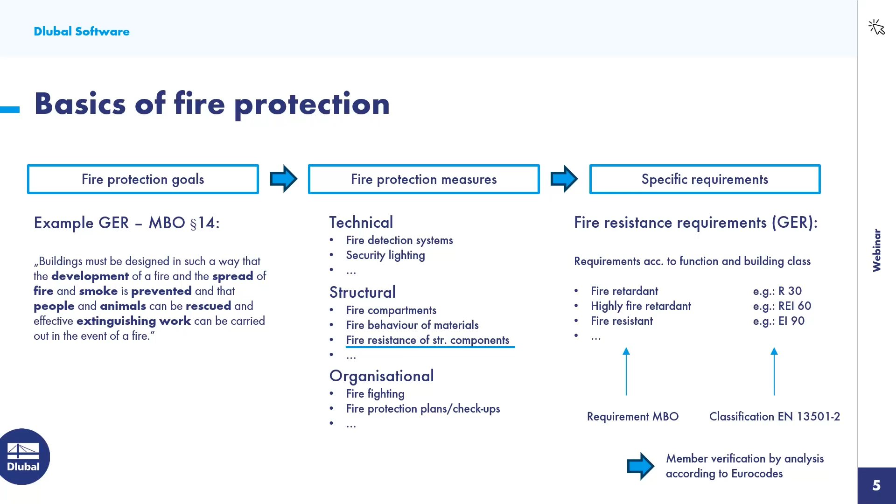So let's take a look at how fire design is regulated in the Eurocodes. I would like to start with the combinatorics.

According to Eurocode 0 or EN 1990, the case of fire is to be regarded as an exceptional design situation. Accordingly, the mechanical actions are combined without partial safety factor. The use of psi 2.1 is recommended in the main document for the leading variable action, but there are many deviations in national annexes. In Germany, for example, psi 1.1 is prescribed for leading wind actions.

It is obvious that the combination rule results in significantly lower actions when compared with the permanent and transient design situation that we commonly use for design under normal temperature. As a safe side assumption, the loads from the cold design multiplied by a reduction coefficient can also be used. However, this is generally uneconomical and therefore not recommended, especially when we use a design software that can do the correct combinations anyway, like RFEM.

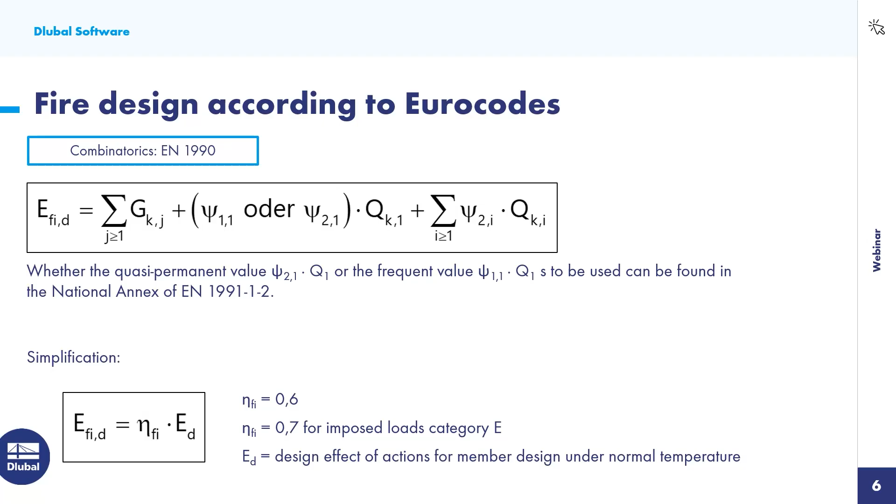In addition to the mechanical actions, the thermal action in accordance with EN 1991 Part 1.2 must also be taken into account. In the event of a fire, there's a considerable increase in the ambient temperature, and sooner or later, the structural elements exposed to the fire will heat up as well. This has a dramatic effect on the material properties of steel components on one hand. On the other hand, the temperature increase can lead to indirect stresses in case thermal expansion is restrained.

Real fire scenarios develop in 4 stages. We have the incipient stage, the growth stage, the fully developed fire phase, and the decay phase. The transition to the full fire phase is called flashover and is associated with a rapid rise in temperature.

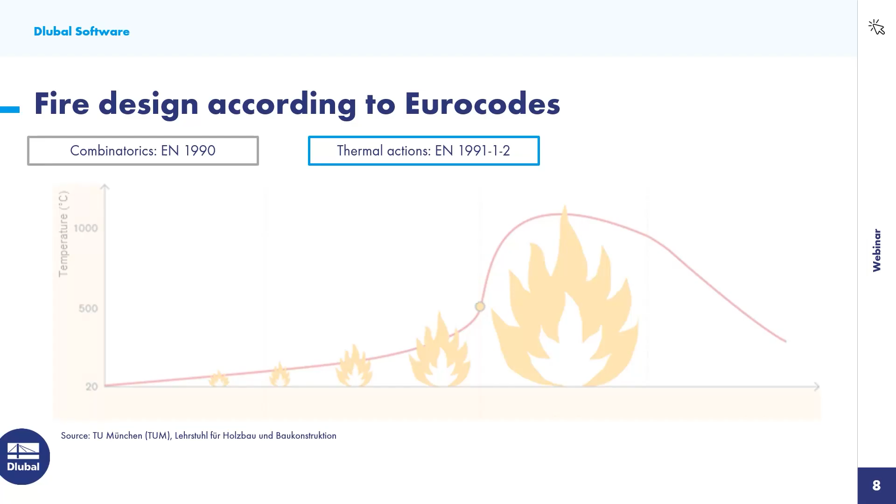For engineers, it is very challenging to accurately predict the development of a natural fire scenario. Instead of trying, so-called nominal fire curves have been established almost 100 years ago to describe the temperature developed in a compartment over the duration of the fire in a simplified manner.

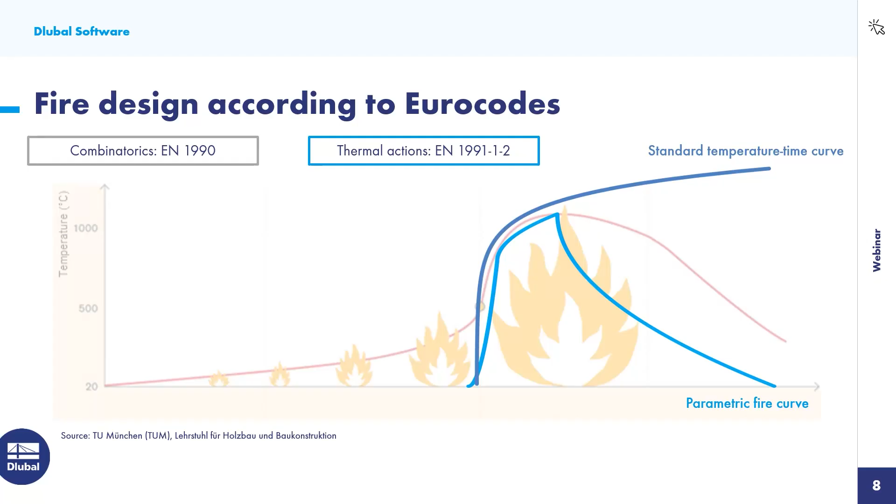The standard temperature curve is used for fires inside buildings. This temperature curve is also used for standardized fire tests on structural elements, which means that the behavior of typical elements under this nominal fire exposure is quite well documented and verified. Alternatively, the Eurocode also allows the use of more sophisticated approaches to predict the temperature development, such as parametric fire curves, zone models, or results from CFD analysis.

The actual design of structural elements is regulated in the respective material-specific Eurocode, such as the Eurocode 3 Part 1.2 for steel construction. In principle, all ECs or Eurocodes distinguish between 3 alternative methods with increasing complexity and accuracy.

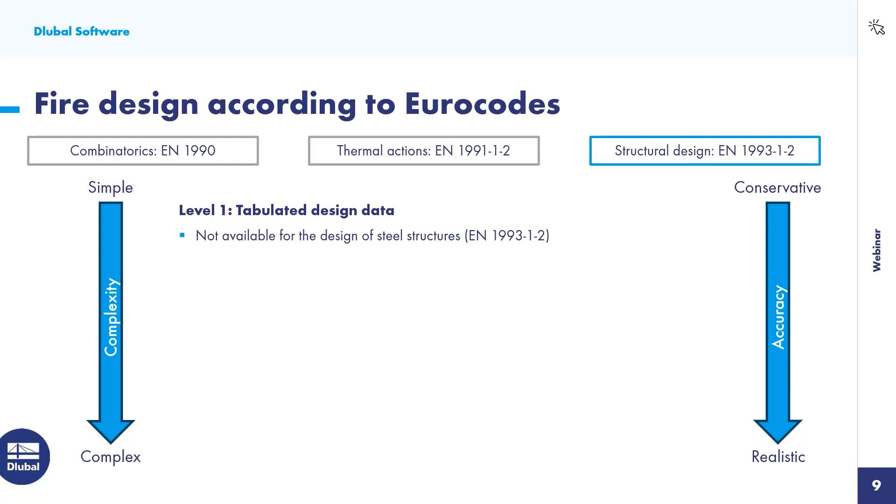The simplest design approach is design by tabulated data. This is oftentimes used for fire design of concrete elements, where it is sufficient to choose the suitable dimensions, for example, wall thickness, for a specific fire class. This approach is unfortunately not available for steel structures.

In the second level, we find the so-called simplified design methods. Here, the thermal actions are prescribed by nominal fire conditions, such as the standard temperature curve for fires inside of buildings. For such conditions, Eurocode 3 Part 1.2 gives clear rules for the design of steel members. This verification can either be done based on the resistance or based on the critical temperature.

The most accurate but also complex analyses are possible under the advanced design methods. The thermal actions are usually derived by more sophisticated methods here, such as parametric fire curves, zone models, or CFD. This enables a more economic design most of the times.

The design rules are very openly formulated. Any suitable thermal and mechanical analysis model can be employed. However, the validity of the chosen approach must be proven on a case-specific basis and requires a high level of expertise. In RFEM 6 and also RStab 9, the resistance-based simplified design method is implemented.

A system calculation under elevated temperatures is not required in this case. The design concept is very similar to the design under normal temperatures, but under reduced load as we combine actions in the exceptional design situation. The thermal action is only taken into account on the resistance side and induces a reduction of design-relevant material properties. I would like to explain this point more detailed in the next slides.

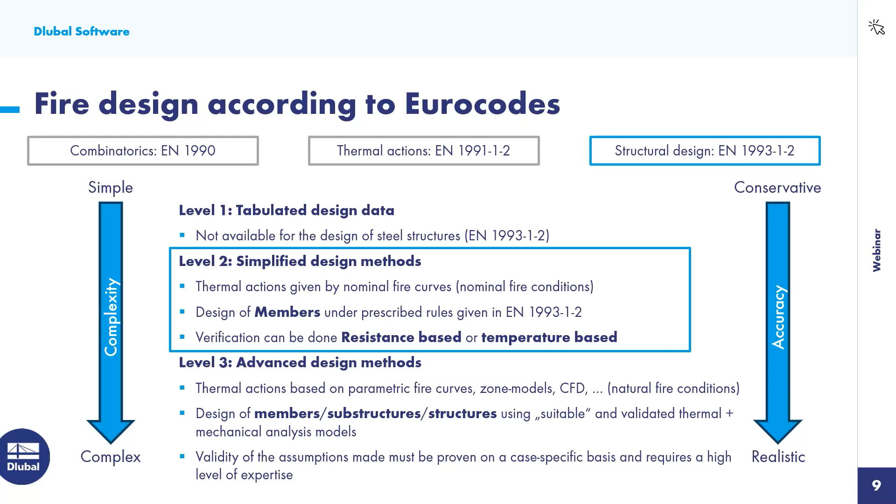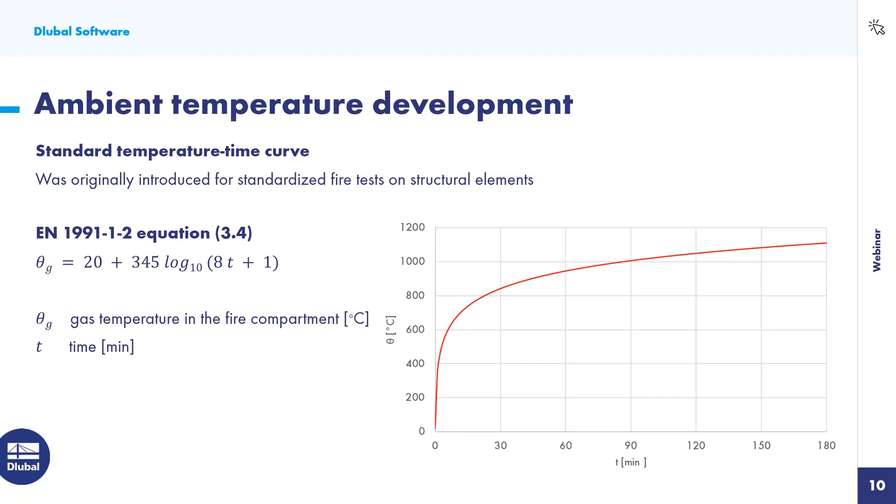As explained on the previous slide, the simplified design method is linked to the application of the standard temperature curve. This means the development of the ambient temperature during a fire is approximated in a simplified manner according to the logarithmic function shown here. The standard temperature curve idealizes the full fire phase and neglects the growth and decay phase of the fire.

So the development of the ambient temperature is specified by the standard temperature curve. However, for design purposes, we are interested in the actual temperature of the structural member. According to EN1 or Eurocode 1, Part 1.2, two different components must be taken into account when analyzing the transport of heat from the surrounding hot air into the heated component.

The heat flux from convection, so the exchange of heat from the hot ambient air and the cold component surface in the boundary layer, and the heat flux from radiation or thermal radiation.

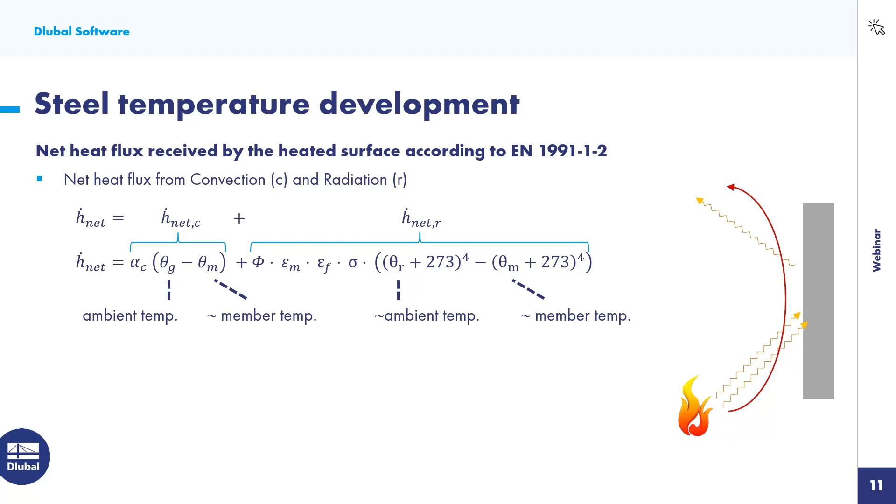We will come back to the various parameters in detail later, as they are important influencing variables for fire design and any fire protection measures. For now, we take note that we can describe the relationship between ambient temperature and component temperature in the event of a fire. But how does the member temperature actually affect the design?

According to Eurocode 3 Part 1.2, design-relevant material parameters such as the yield strength and stiffness must be reduced depending on the material temperature. The yield stress only has to be reduced at temperatures above 400 degrees Celsius, but then quite rapidly, as you can see here. The stiffness already decreases at significantly lower component temperatures.

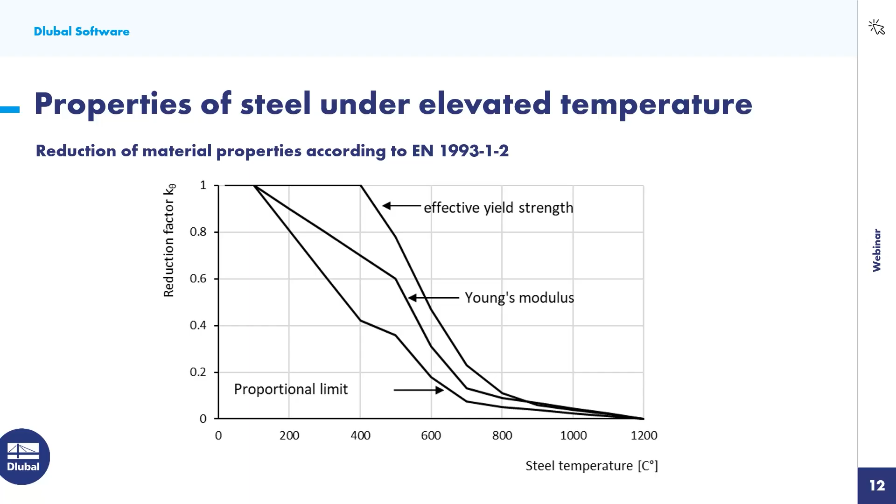Okay, so I have already prepared this simple model beforehand. It's just a simple beam with an intermediate support in lateral direction in the middle. It's an HEA 300 section and 10 meters long. I think the steel is S235. This member is already loaded by 3 load cases: self weight of the beam itself, then an additional dead load of 5 kilonewton per meter, and load case 3 is imposed load category B with 7.5 kilonewton per meter.

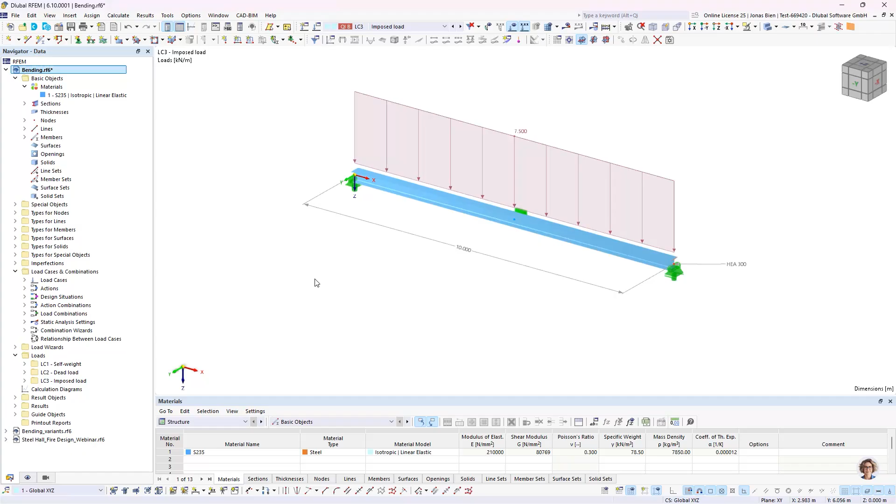I've also defined one design situation for the code design of this member, so the usual combination permanent and transient, as you can see here, and this results in automatically generated load combinations.

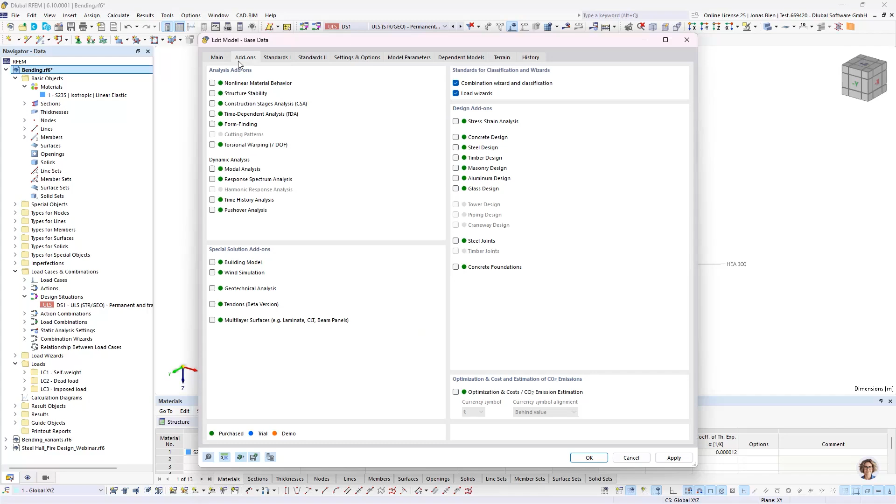I want to start with the code design. So I switch on the steel design add-on, go to standards, and for now I will just use the main documents of the Eurocodes and use the common rules.

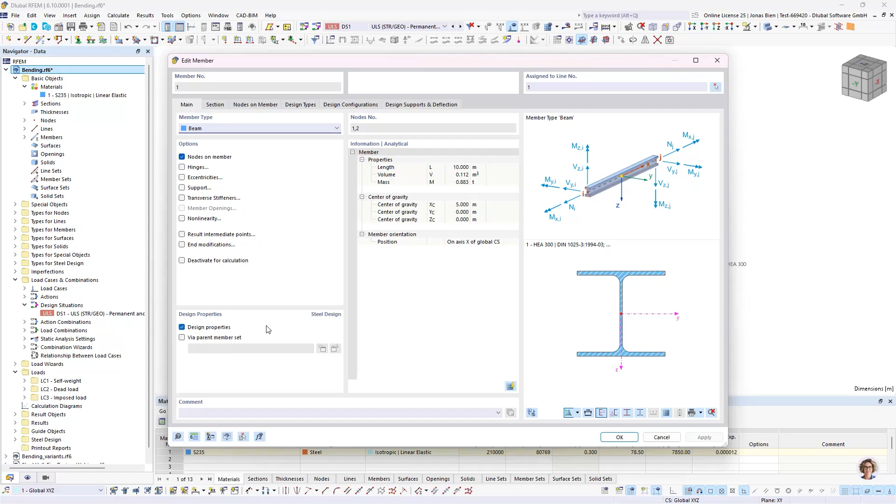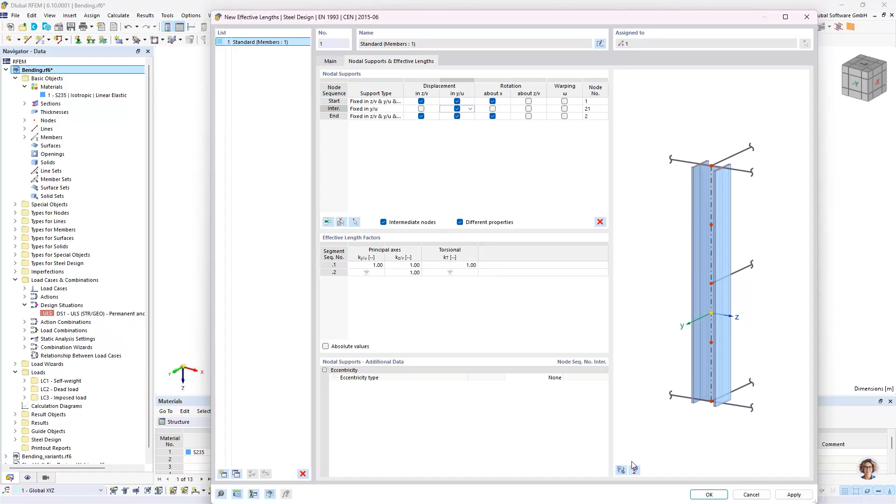As we are used to, the design add-on has already recognized that we have this member that can be designed with our steel design add-on. Besides the section checks, I also want to do the check for lateral torsional buckling according to the equivalent member method, so I will define an effective length. I want to leverage the intermediate node, so I will assign a lateral support here at the middle, as we have modeled it in the global model as well.

Okay, so let's do this. By the way, this assignment of the buckling length is valid for the code design and also for the later fire design that we are doing.

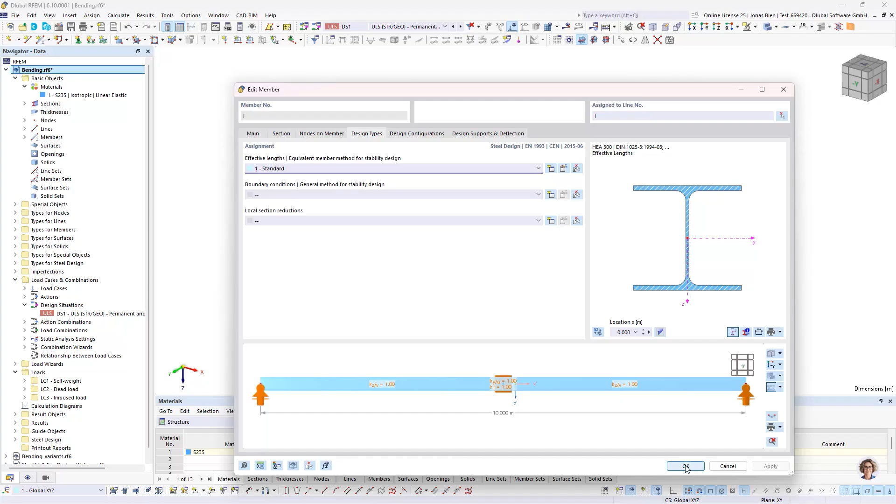But for now, let's start with the code design, the usual thing that we know. I will just run the simulation now, this very simple case, and we will check the utilizations that we get under normal temperature. As we are used to, we get section checks for shear and bending, also shear buckling. Since we activated the buckling length, we also get the stability check for lateral torsional buckling. We can see that the maximum utilization is around 83%.

So this is completely fine, everything's good so far. Now let's see how this changes when we investigate the fire scenario. Let us do all the adjustments that we need in order to activate this. First of all, we need a design situation that is appropriate for our fire case.

So I will add a second design situation for the accidental load case using psi 2,1 as it is prescribed in the main documents of the Eurocode. We can again check the combination rule, and this is totally fine for us and looks like the rule that I showed you before in the slides. Okay, so I get two additional load combinations now for the fire situation.

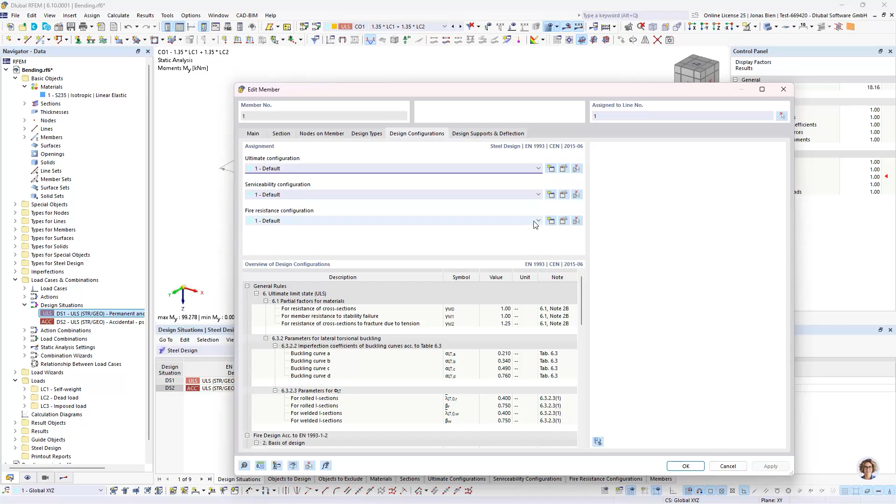In here, we first have to define what the resistance class of my member is going to be, so at what time I want to perform my fire design checks. In this case, I assume my member needs to survive for 30 minutes, so it has an R30 requirement. I will set 30 minutes as the required time for fire resistance.

We can also see under the temperature curve for determination that we have, by default, the standard temperature time curve set, and this is the one we want to use for internal fires and the member design method here. We could also give a manual material for the program to use in the fire design checks, but we want the temperature of the steel defined by the standard temperature time curve.

And we want to do the check after 30 minutes. The remaining parameters I will not touch yet - we will come back to this later. So I will just assign this by clicking OK, and then I will run the steel design again.

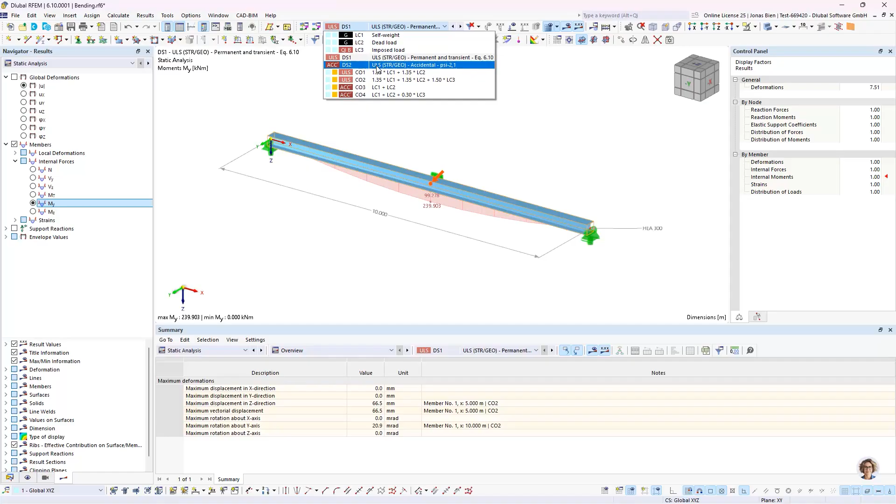We have to solve now the two additional load combinations, and then the steel design runs again. First, I want to compare the forces that we now have to take for the design. If we check the maximum bending moments for design situation 1, the cold design case, we have a maximum bending moment of almost 240 kilonewton meters, while in the second design situation under accidental combination we get more or less 100 kilonewton meters. So the load we need to consider in the hot design is much smaller than in the cold design.

However, as we could already see, we now have a big problem with our design verification checks. The maximum utilization is over 300%, so that's not good at all. Let's check why that is, and how the utilization is so much higher than in the cold design stage. Let's compare some design checks.

We could start with the bending check about the strong axis, starting with the cold design, which we are very used to. We have the 240 kilonewton meter design bending moment. We do the section classification and see we have a class 1 section, meaning we can use the plastic design resistance to calculate our utilization. In this case, we have a utilization under 80%.

But how does this change in the fire design situation? Let's check the respective check under increased temperature. We see we have a smaller design bending moment as already shown before, and now we also have a different section class. That's interesting, and we can check what the reason for this is.

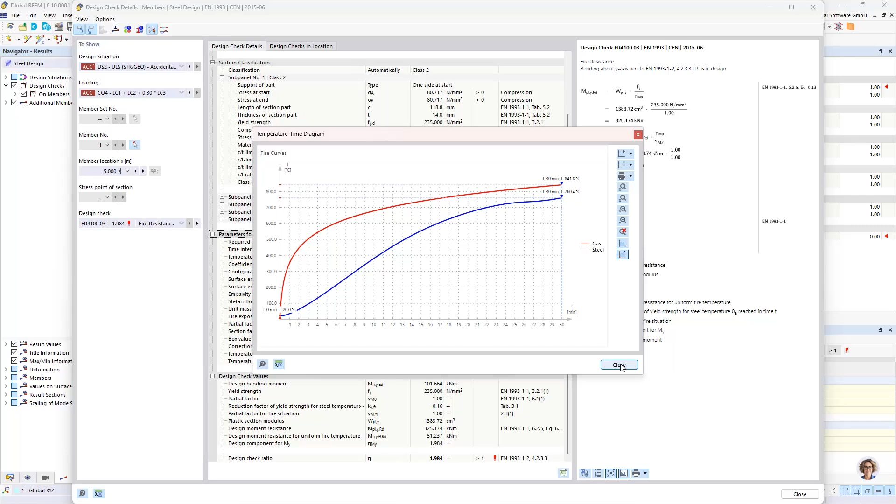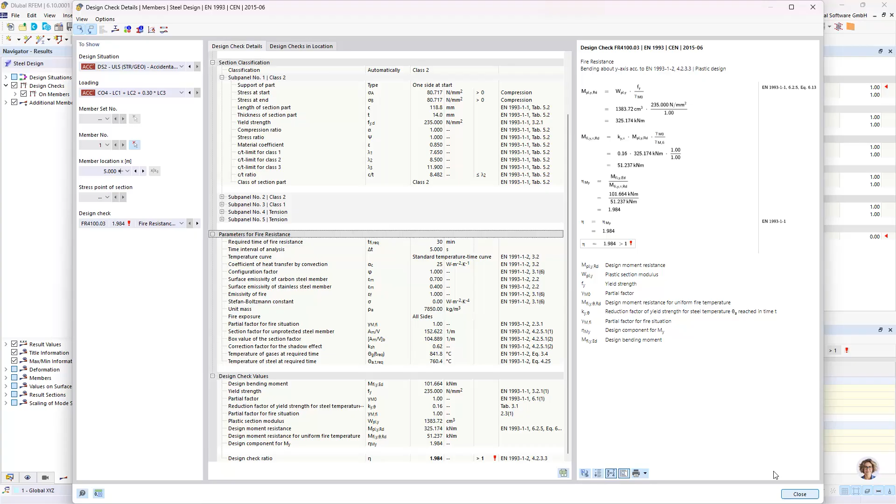There are also some other parameters here given for fire resistance. Up here we find all the settings assigned to this member by the fire design configuration, and then some additional parameters that I will focus on later. But for now, we can see that for the cross-section checks, we have a drastic reduction of the resistance due to the increased temperature, which is very high in this case. Maybe we can also check the stability design check, because that also reveals some details to us.

First of all, we calculate the critical bending moment the same way as we do it for the cold design. I think this 757 should be the same for the cold case as well. When we check the stability design check, yes, it is 1-to-1.

But then in the fire situation, we have to again reduce it by taking into account a modified dimensionless slenderness. In this case, this dimensionless slenderness is not only modified by the reduction factor for the yield stress, but also depends on the reduction factor of the stiffness, because stability design checks are also very much dependent on the stiffness of the system. So any degradation on that side will also alter our verification check for instability.

Another important point is the derivation of our imperfection factor. While in the cold case this is dependent on the cross-section buckling curve, here it is only dependent on the material of the section. So there are slight adjustments, but otherwise the schema for the verification checks is very similar to the cold design case.

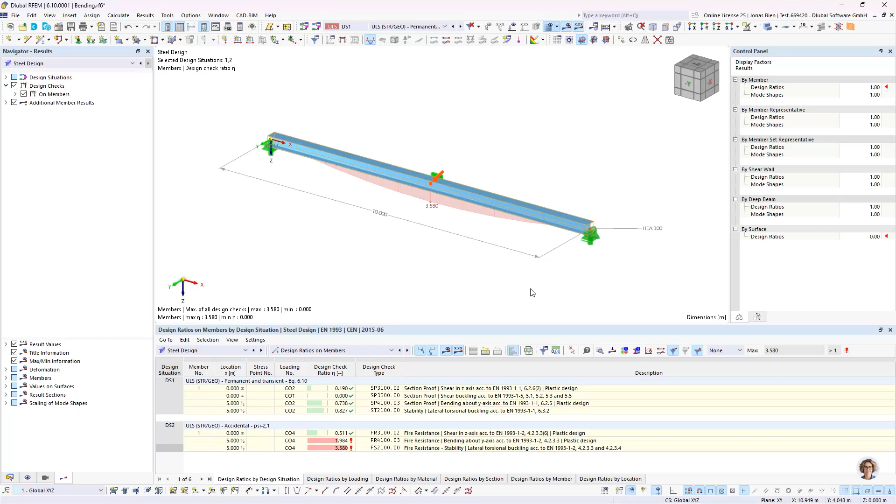I think we can agree that our first attempt to verify the fire resistance of this beam was not very successful. So what can we do to increase the fire resistance of our beam? Of course, we could lower the loads or increase the section size, but we have seen that the member heats up very quickly and we have only minimal strength and stiffness after 30 minutes.

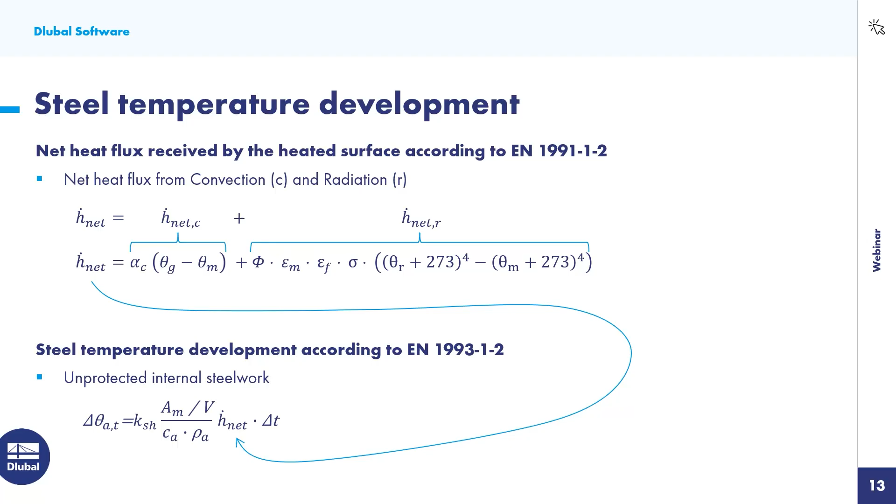To discuss possible measures we can take to delay the heating process, I would like to come back to our formulas that describe the heat transfer from the ambient temperature into the structural element. We've seen these before, and if we combine the two formulas, we get this quite long expression. Most of the parameters represent physical constants that we as structural engineers cannot influence as much as we'd like to: the specific heat of steel, the density of steel, the coefficient of heat transfer, the configuration factor, the emissivity of fire, and the Stefan-Boltzmann constant. Those we shouldn't touch at all.

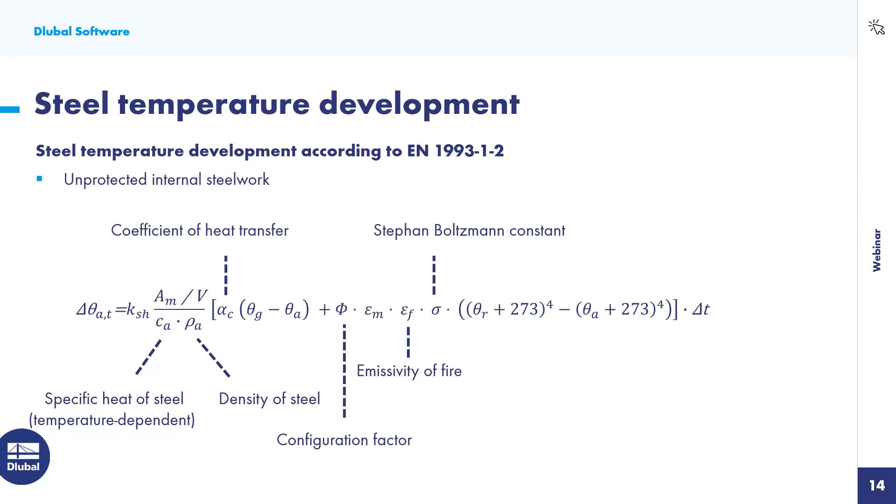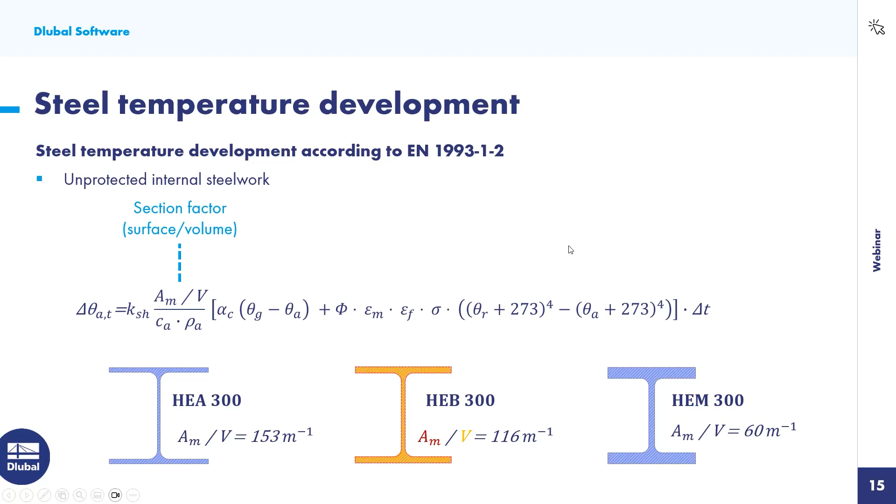If we now compare the three cross-sections shown here, the HEA, a bit more slender than the HEB, and then the more compact section, HEM 300, we can see that the circumference of the profile hardly changes as the cross-section parts become thicker, while the cross-section area increases significantly. This means that more compact cross-sections have a lower profile factor, as demonstrated in this example calculation, and as a consequence, since the profile factor is in the numerator of this heating equation, compact sections heat up more slowly. We will check this in a minute in the model again.

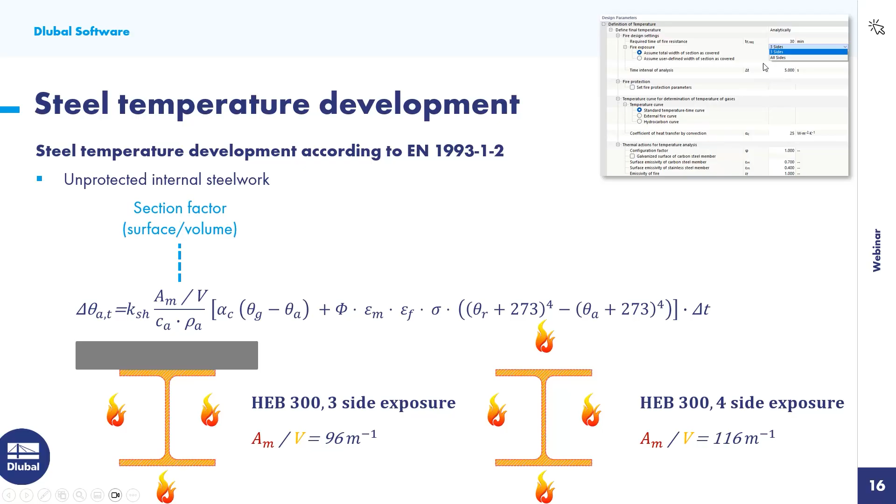But there are also other ways to reduce the profile factor. For example, if one side of my cross-section is protected from direct fire exposure, as shown here in the lower left figure, I can reduce the circumference by one flange width. So this could be relevant if we place a column next to a concrete wall or put a concrete slab above a steel girder without leveraging composite action. Such a situation can also be considered in our program through the fire configuration settings. I will also show this later.

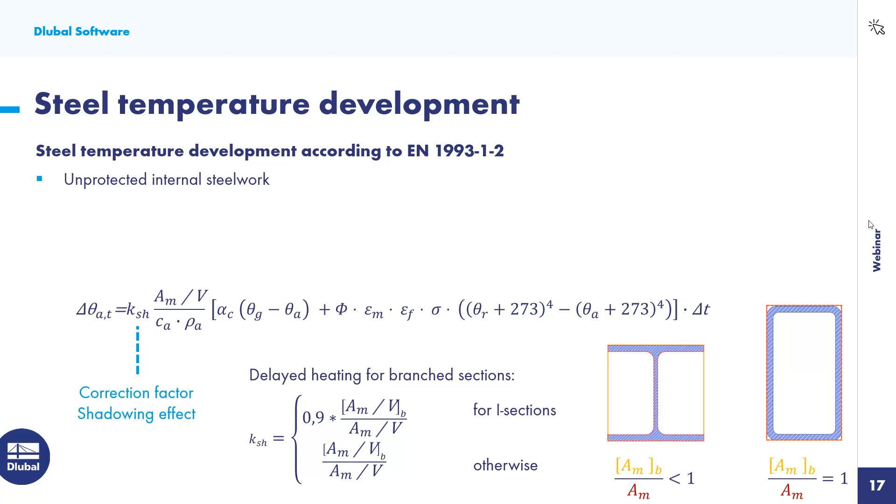Let's check if we can observe the described behavior also in our program by taking the appropriate settings. So let us switch to RFEM again. I have also prepared a second model where I basically just copied my simple beam HEA 300 that we discussed before and changed the section into an HEB 300 and HEM, as I've also shown you as an example on the slides.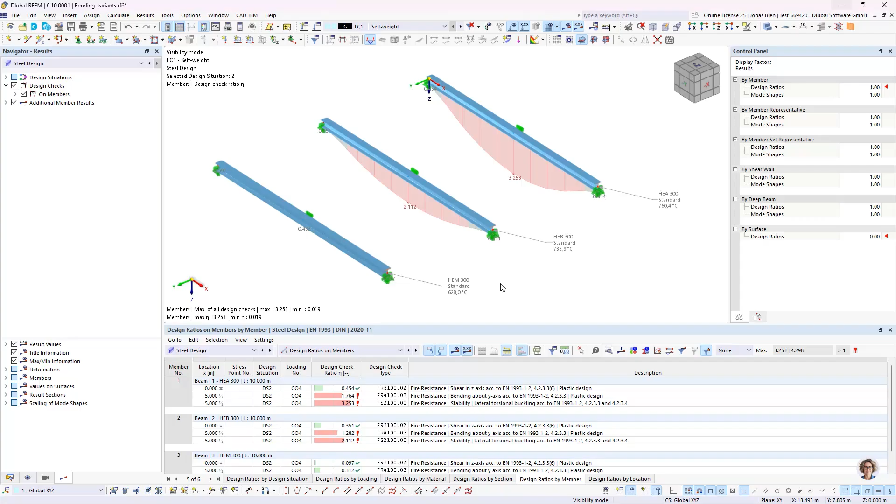I applied the same loads and so on, and I conducted the fire design checks here. It's of course no miracle that the utilization factor for the bigger profile, HEM 300, is lower. This is expected when we choose a more capable section. HEM has a higher bending resistance and also much lower slenderness, which comes into play when we look into the lateral torsional buckling design check.

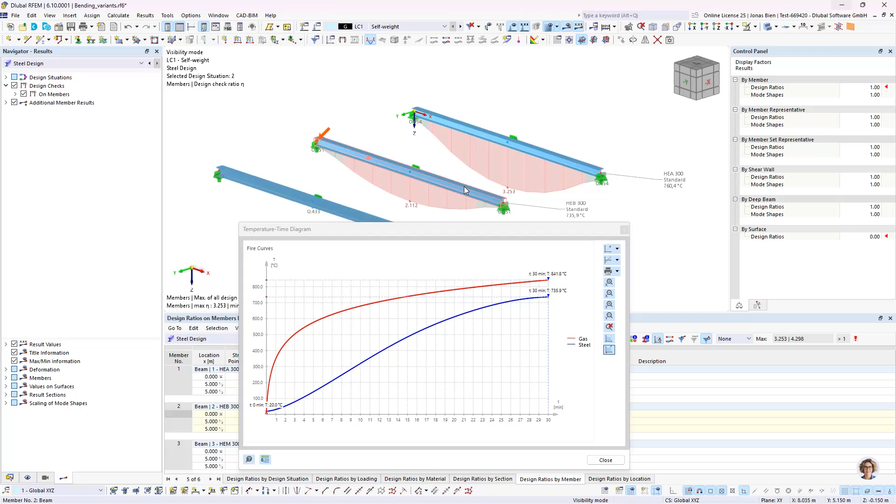But we don't want to focus on that, but on the member temperature and how it develops during the fire event. We have already checked the temperature development for our HEA 300, and we've seen that at the end, at 30 minutes, we have 760.4 degrees Celsius. The HEB 300 is only a bit colder, at 735.9, but when comparing this to the HEM, we see that by taking this much more compact section, we get a lot less heating after 30 minutes. The HEM only has a temperature of 628 degrees Celsius after 30 minutes, although unprotected.

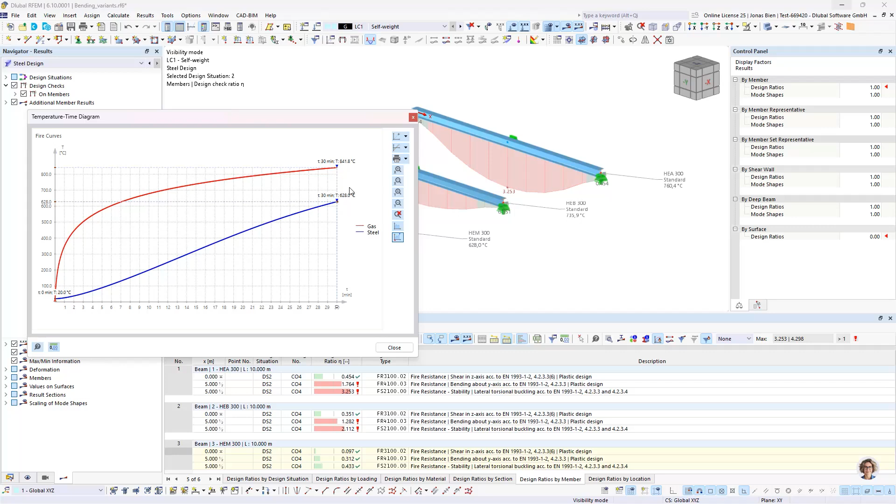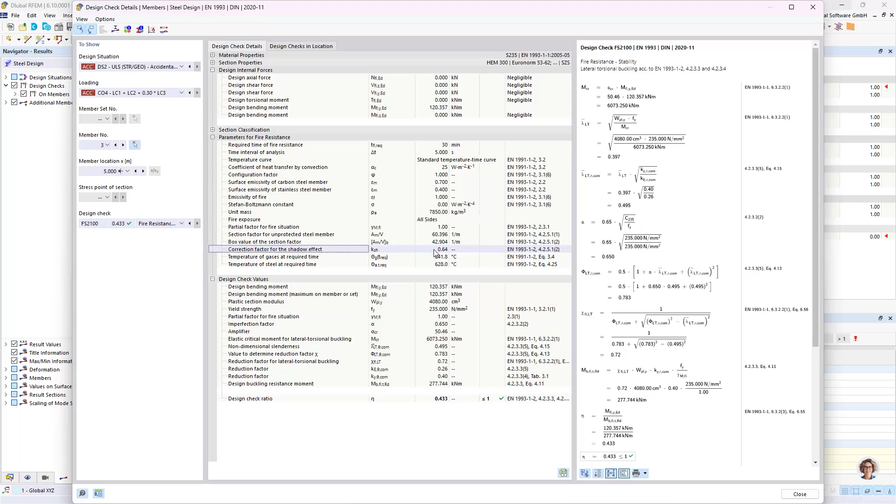We said this is because of the profile factor, and we can check this profile or section factor here in the design details for all these members. We can see that as we move on to member number 3, which is the HEM, we have a very low section factor, resulting in lower temperatures. We also see the correction factor for the shadow effect that we talked about, also given in the design details.

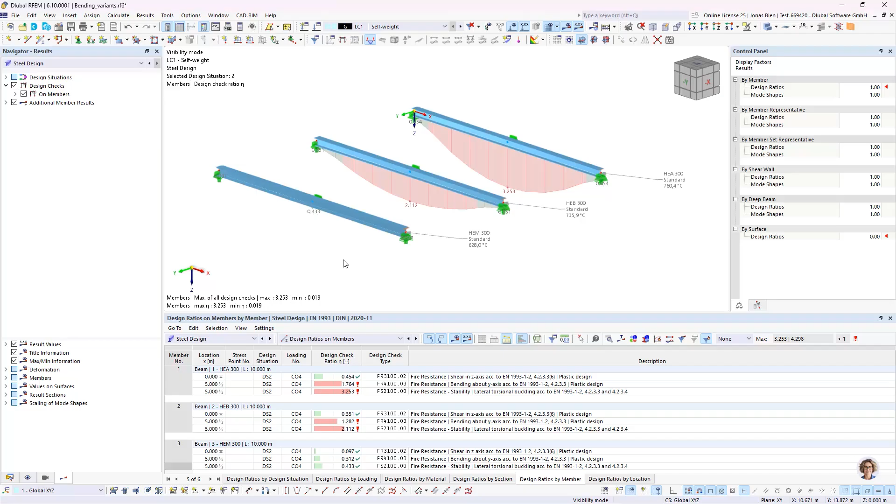We also talked about a second option to reduce or manipulate the profile or section factor, and this would be by avoiding all-side exposure to the flames, for example, by a concrete slab. I have also added another example where I modeled an HEB 300 and modified the fire resistance configuration so that I only apply a 3-sided fire exposure. As a result, we can see that compared to the standard fire case with 4-side exposure, it heats up around 30 degrees Celsius less after 30 minutes, which isn't a huge deal, but it's something.

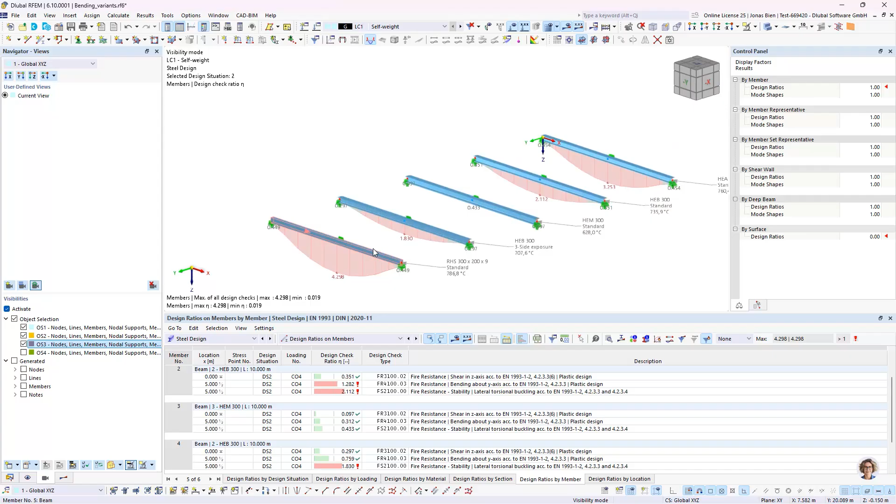Last but not least, I wanted to show the influence of this correction factor for the shadowing effect. I also incorporated a hollow section here, an RHS profile, which has a similar section factor as the HEB 300, but it doesn't profit from the shadowing effect. Let's go to the design details, where we can also check the ksh factor, and in this case this factor would be 1.0. So we couldn't leverage any of this here, and accordingly it would heat up a bit more even.

Okay, that's about the section choice and how the section choice modifies or impedes the heating process of the member during the event of a fire. But there's actually another factor that we can manipulate and alter to adjust the heating process.

So let's go back to the PowerPoint, to the next slide.

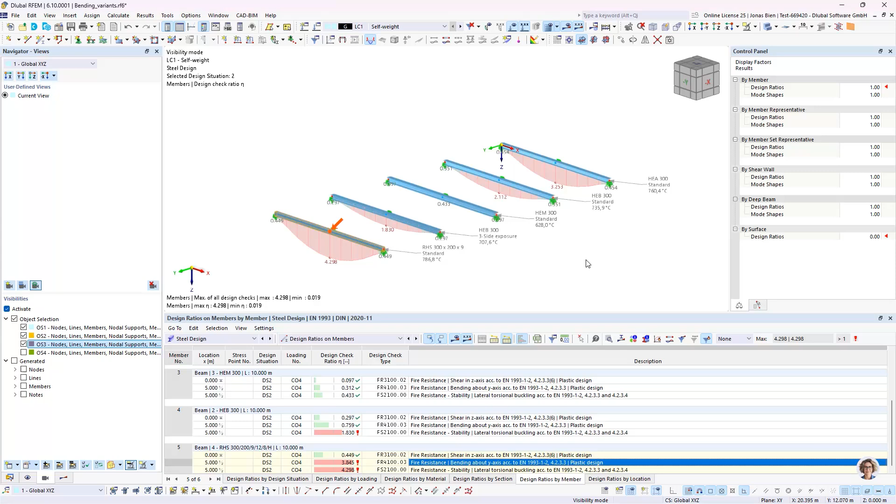Now I want to modify the selection of the members that I have modeled up front. I again have copied all of those members that I've shown you before, different sections, and also the HEB with the three-sided exposure, and modified the fire design configuration in such a way that I also changed the emissivity by galvanizing the surface of the carbon steel. I can do that by just activating this option here, and then it actually also takes into account this limiting temperature of 500 degrees Celsius, and until then uses a lower surface emissivity.

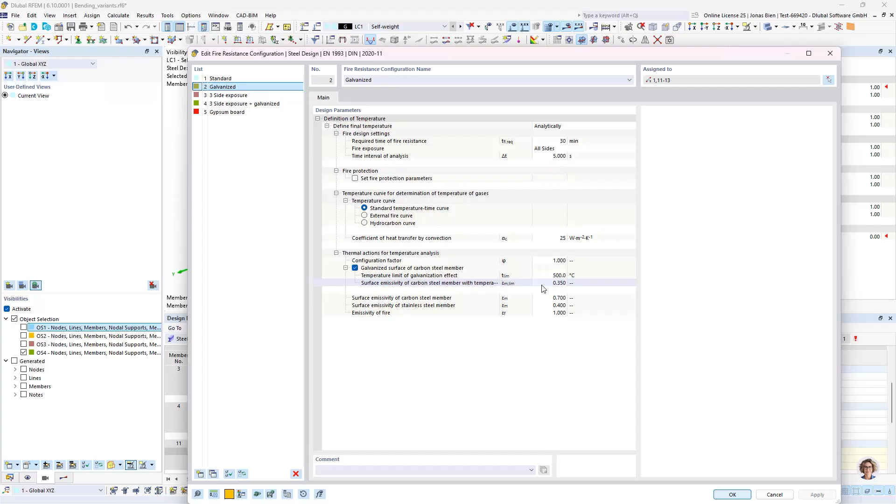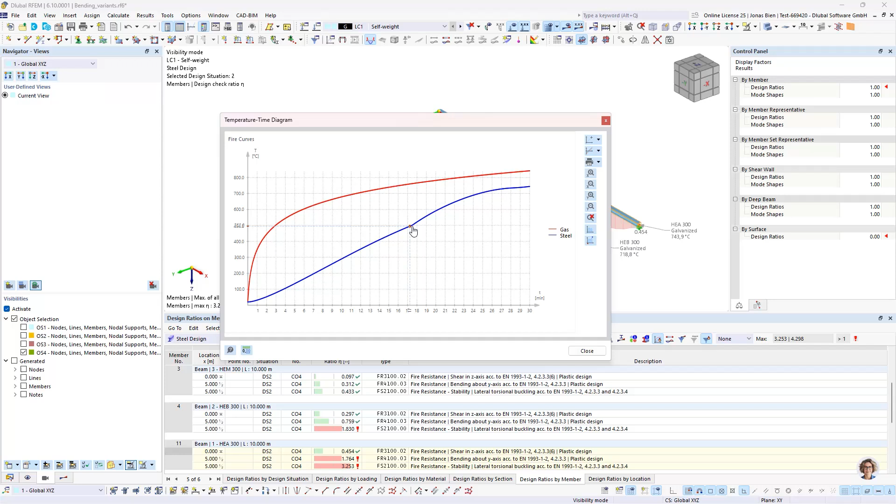Okay, so let's see how this again affects the heating up of the member. We can see for HEA it does not have such a huge effect. Same goes for the HEB300. Let's actually look into one of those diagrams, because it reveals the fact that the emissivity changes at a temperature of 500 degrees. As we can see here, there's a significant dent in this curve, and this is at a temperature of 500 degrees Celsius and marks the point where the emissivity jumps from 0.35 to 0.7.

For the HEM profile, actually the influence of the galvanization is very, very huge. Instead of a temperature of 628 degrees Celsius, we get a temperature that is almost 150 degrees lower after 30 minutes. And that's mostly because for the whole 30 minutes, we are below a member temperature of 500 degrees Celsius, which means that until the end, we can leverage the lower emissivity of the member surface. The benefit is much greater because it's more or less the integral of the heating over the time.

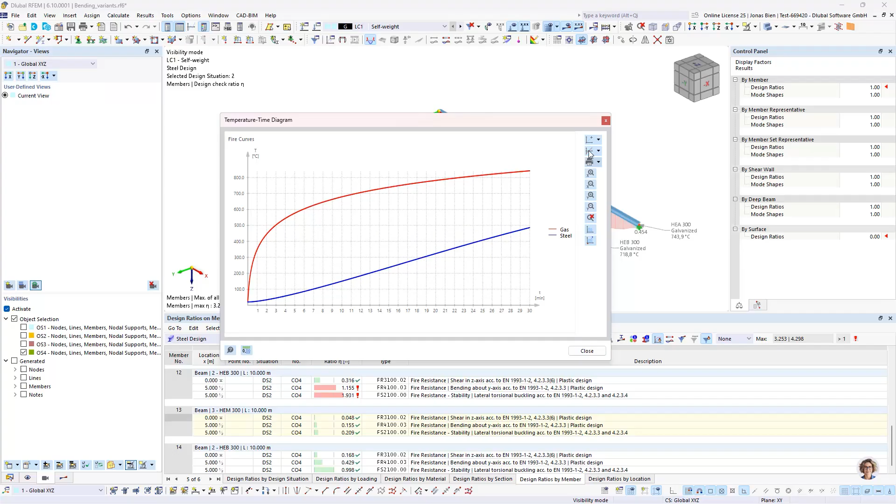But it is also interesting that, for example, when we consider an HEB300 and maybe anyway have one side of the section covered by, for example, a concrete wall or something, and we then take into account additionally the galvanization that we might anyway have because of corrosive protection measures, we see that we can reduce the member temperature from 736 degrees to 633, and we see that under this temperature we are even able to fulfill the verification checks, and instead of a maximum utilization of 200 something percent, we go under 100. So without any additional measures in this case, we could already fulfill our fire verification checks.

All right, last but not least, let us talk about conventional fire protection systems. Therefore, I would like to switch back to the PowerPoint presentation.

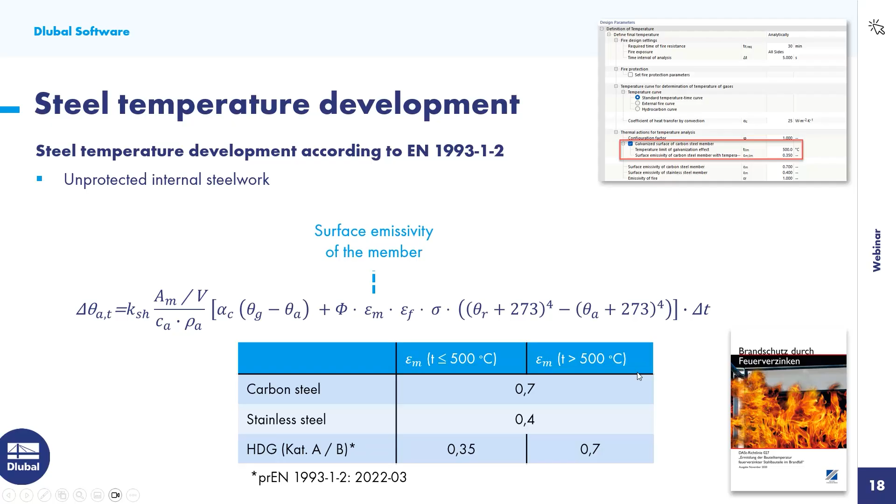As said earlier, the possibility to improve fire resistance by galvanization is very interesting, as many steel structures are galvanized anyway for corrosion protection. In this case, the improved fire protection is a nice bonus.

But conventional fire protection systems exist as well. They have a much higher protective value, and they can also be taken into account in our program. We can consider spray, plaster, or board encasement, and such systems can be accounted for using an alternative formula provided by Eurocode 3 part 1.2 for the temperature development in internal steelwork insulated by fire protection material.

In addition to some parameters we already introduced earlier, the properties of the fire protection system are also taken into account: the thermal conductivity, the thickness, the specific heat, and the density of the fire protection system.

There's also one specialty to consider when calculating the section factor, because it depends on whether I use spray plaster, applied on the perimeter of the section, or board, which usually leads to a hollow encasement. I have to calculate the section factor accordingly, either using the perimeter of the section, the hollow encasement, or a fictitious encasement, as shown on the lower right side of this figure.

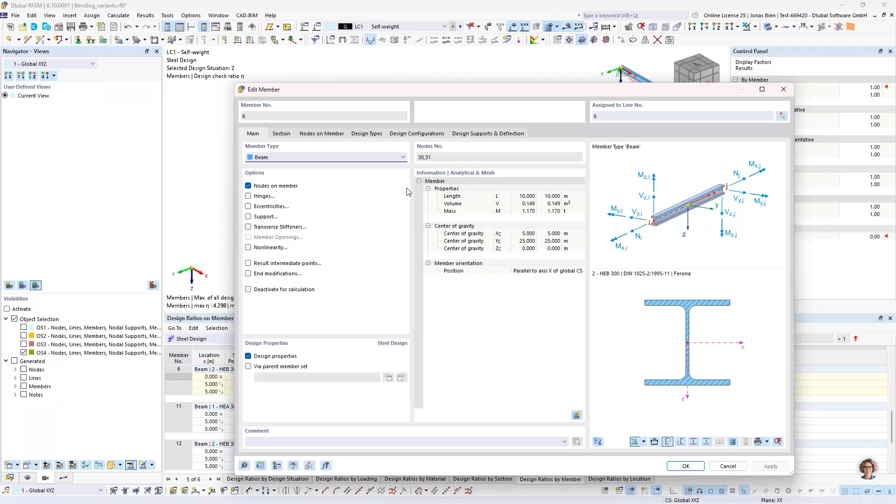Let's jump back in and reveal the last member I modeled here. In this case, I modeled an HEB 300 with a 12.5 millimeter gypsum board encasement. Let's check what I've done to realize this. I go into the fire resistance settings, and there I choose the fire protection parameters.

I have a drop-down menu where I can choose between the contour-following or the hollow protection type, and then I just add the properties of my fire protection system based on literature or properties I get from the manufacturer of the fire protection system.

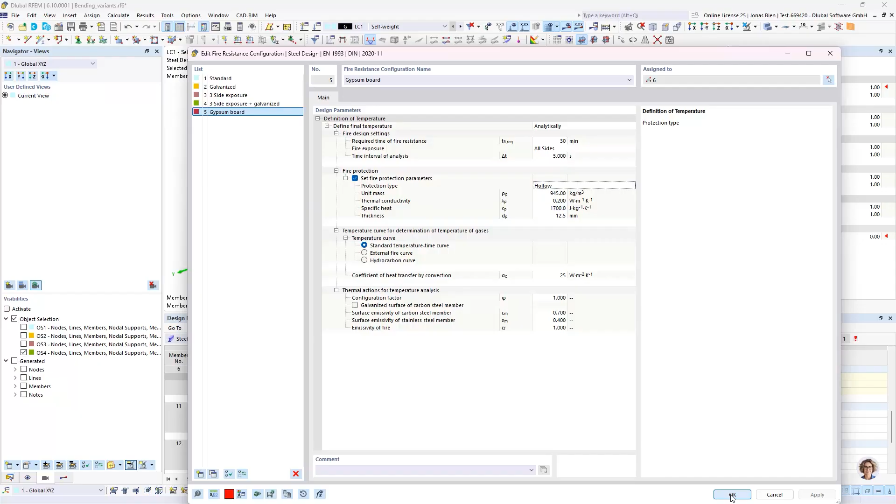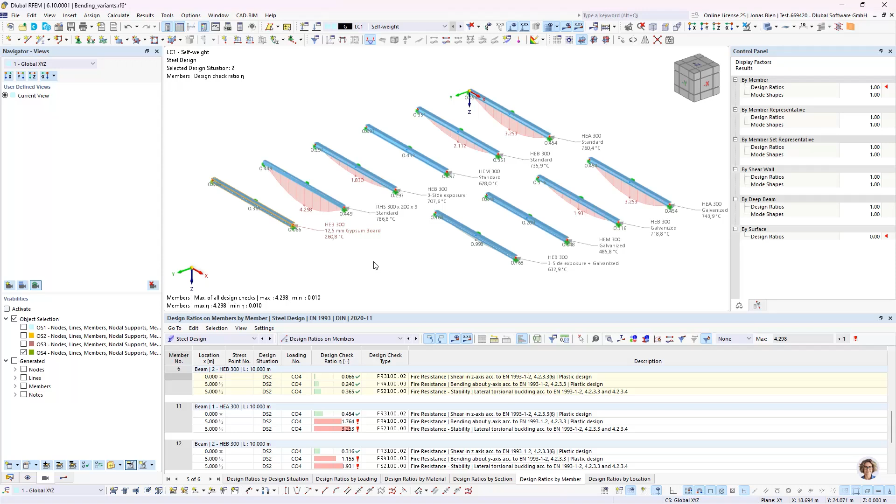What I can see is that this has a dramatic effect on the temperature. In this case, with the encasement, I get a very low temperature after 30 minutes, below 300 degrees Celsius. So higher fire resistance classes like R60 or R90 can also easily be realized with such sophisticated fire protection systems.

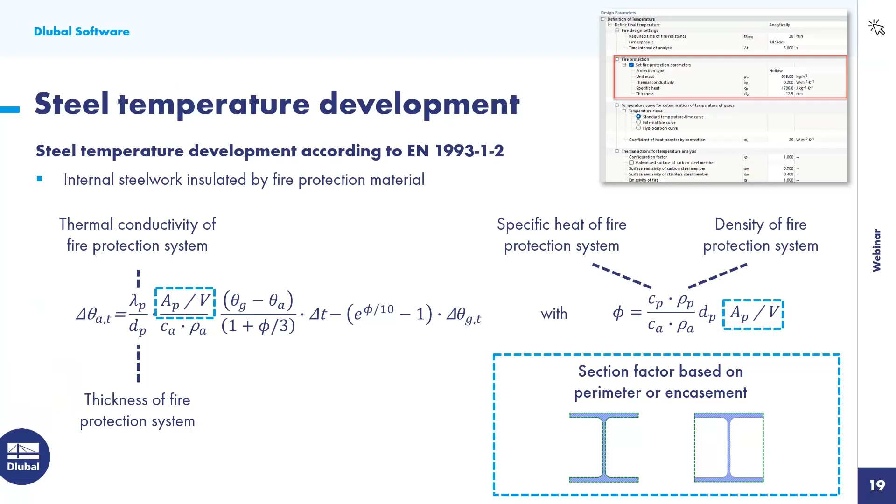We have now dealt extensively with the fire design assessment of a single member and checked how we can influence the temperature development in that member in the event of a fire. I would now like to move on to more advanced topics and questions.

I've summarized the relevant paragraphs of the Eurocode on the next slide. Let's check this out together.

In Eurocode 1, part 1.2, section 4.2(1), it is written that indirect actions from adjacent members should not be considered when fire safety requirements refer to members under standard fire conditions.

There is also the clause in Eurocode 3, part 1.2, section 2.4.2, that the effects of thermal deformations resulting from thermal gradients across the cross-section shall be considered, while the effects of axial or in-plane thermal expansion may be neglected. Because the formulas we use to determine the heating of our section always assume constant heating over the section, we don't need to take into account the thermal deformations at all.

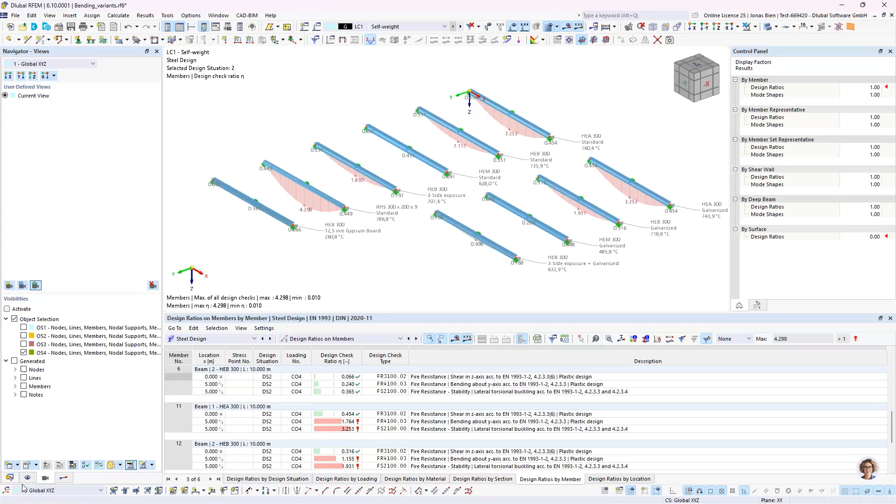Okay, let's go back to the program and go into the third model I have prepared, which is basically the steel hall that you have seen on the slide before. In order to take the indirect actions or to calculate these indirect actions, we first need a temperature that we want to apply to this model.

This temperature we could either derive by the standard temperature curve, or by some other specification like a parametric fire curve, CFD analysis, whatever it is coming from. We need to make some assumption about to what degree our structure heats up, and then we can apply this temperature load via, for example, a member load.

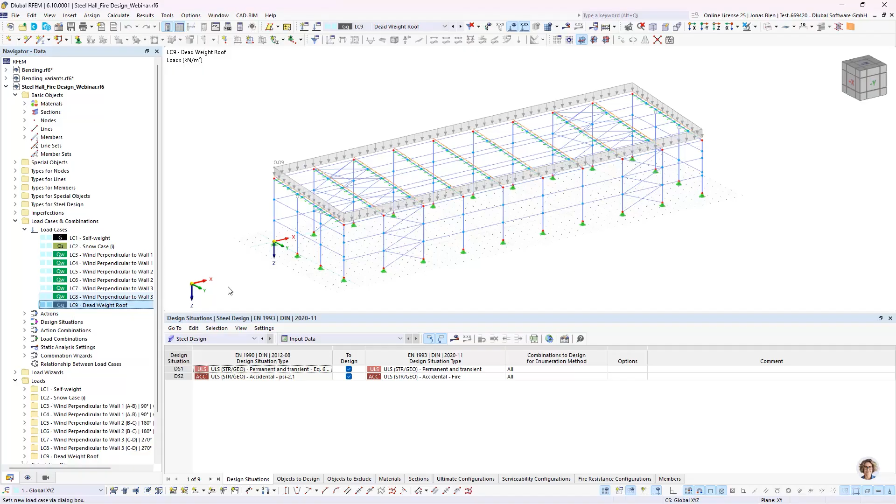So I want to go ahead and create a new load case for this temperature load. In this load case, I think it's sufficient to do it here. We want to analyze the effect of the thermal expansion. So I create load case 10 and name it temperature.

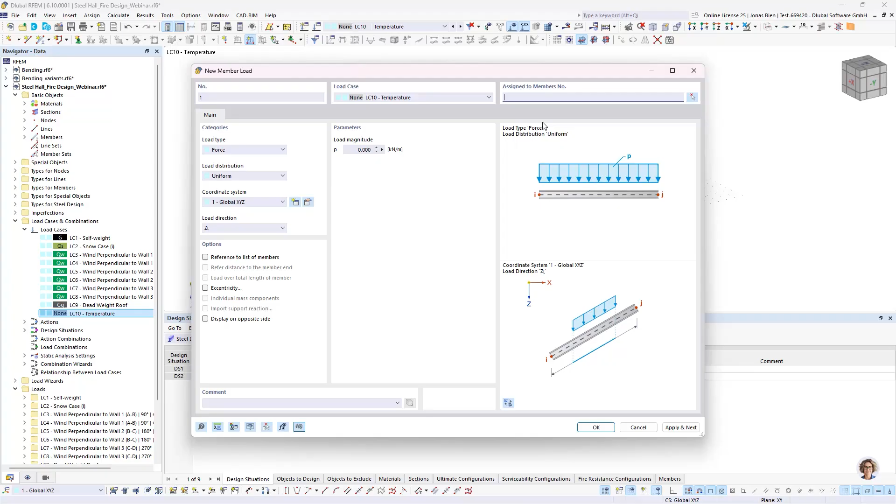In this load case, let's say we aim for a 30-minute fire under a standard temperature curve, which would give us an ambient temperature of around 800 degrees Celsius. I have many sections here which would all heat up differently, but I will now, on the safe side and for demonstration purposes, apply a uniform temperature change to all members of 800 degrees. So that's just some assumption.

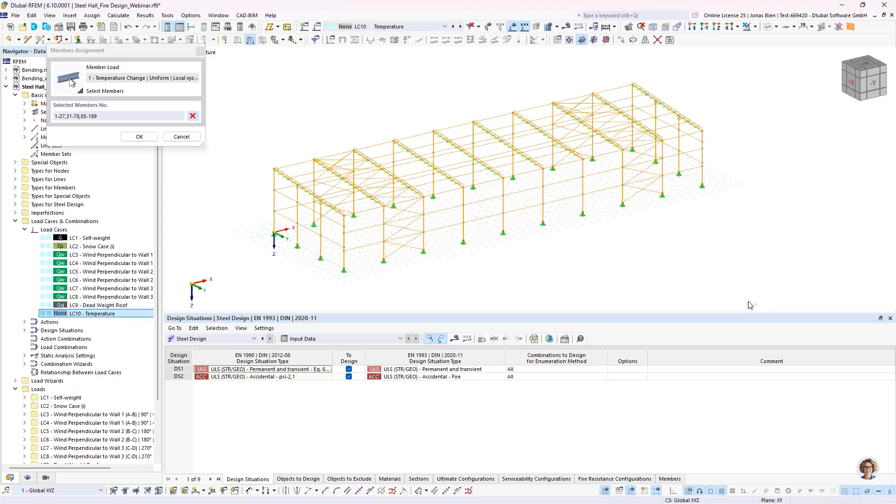Okay, so I select all members and apply a constant temperature over the section, temperature increase. And now I could just run this analysis here and calculate the resulting reactions under this temperature increase.

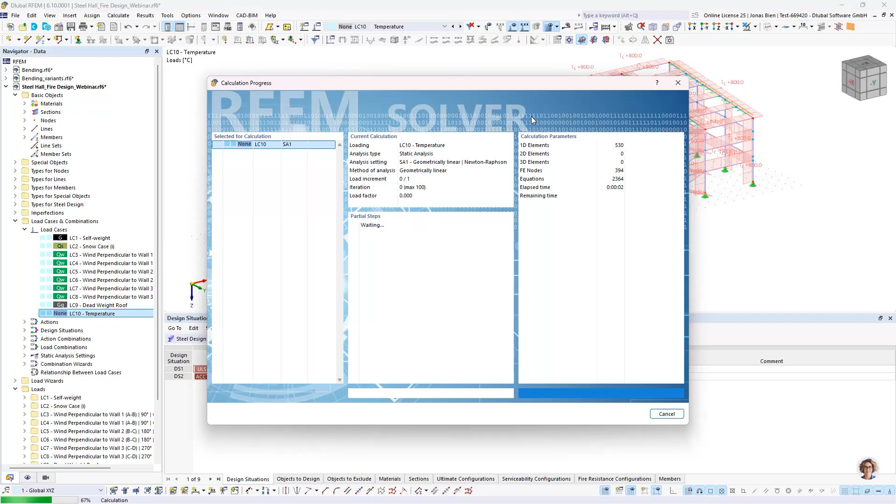I would actually be shocked because, as you can see here, we get very large restraining forces. As I already mentioned, the steel wants to expand, and in this steel hall we have bracings in some of these bays, and the compression members between those braced bays cannot expand very much. So the thermal deformation actually goes into axial force, and we get a very huge compressive action in these members.

But now we have to consider one thing: Eurocode 3 part 1.2 says that we have to also modify our mechanical properties of the steel at elevated temperatures, and we can take this effect into consideration as well. When we remember the diagrams we looked at regarding properties under elevated temperatures, we may recall that we do not only decrease the strength of the material with increasing temperature, but also the stiffness.

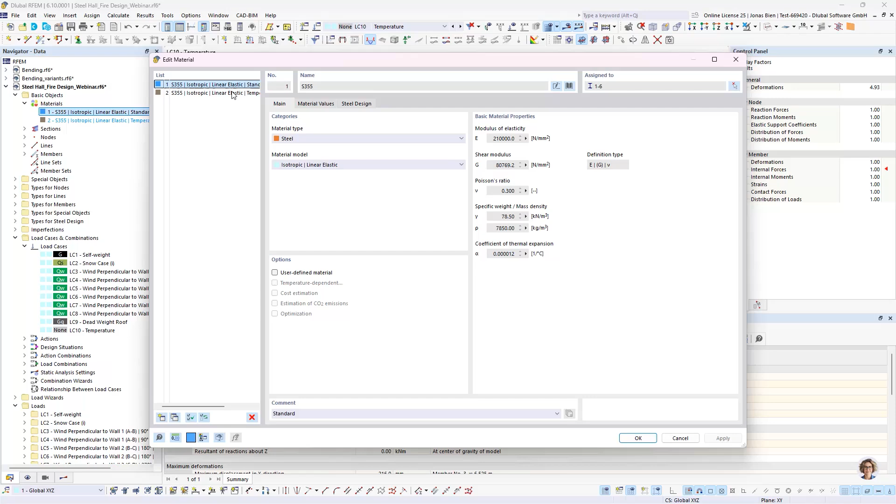The lower the stiffness, the lower these restraining indirect actions will actually be. So I have already prepared two materials. The first one, used for the first calculation step, was just a regular mild steel S355. The second one is a copy of that, but here I activated the user-defined material option and the temperature-dependent option. By doing so, I am then allowed to enter a temperature-dependent modulus of elasticity, for example, and this curve is copied directly from Eurocode. All these points are given in the Eurocode document, and we can leverage this to enter our temperature-dependent material properties.

Also, the coefficient of thermal expansion is dependent on temperature, and I can take this into account as well here. Now let's see what happens if we actually take this temperature-dependent material into account, and how this affects the results, the indirect actions that are generated under elevated temperatures.

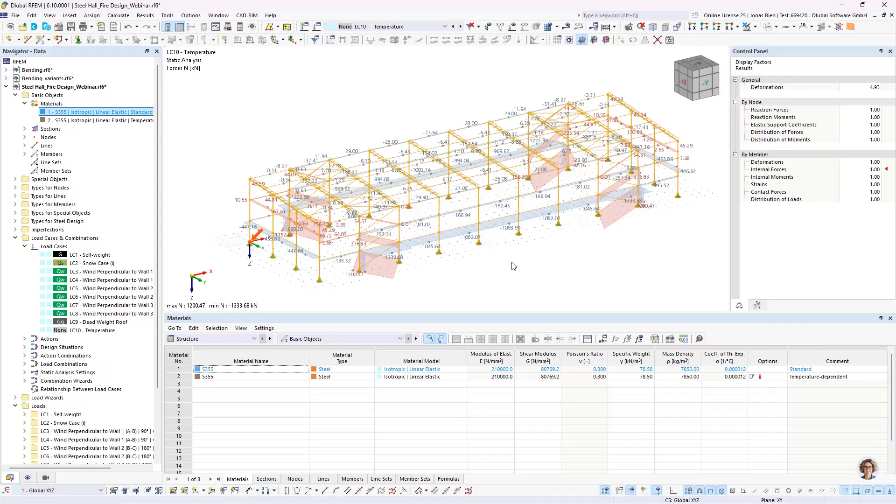So we remember we had in the first attempt compression forces of over 1 meganewton. Now we go into the simulation again with the temperature-dependent material, and let's wait a bit, but we should see that those compressive forces are very largely reduced. Yeah, we can see that it is almost reduced by a factor of 10. So now the compressive force left over at a temperature of over 800 degrees in the member is around 100 kilonewton.

So whenever we want to take these effects into account, we always have to remember that we not only have these restraints that add actions into our model, but we also at the same time have the degradation of the material properties, which in this case helps to lower these restraining forces in the model.

Okay, so that's it for that question. Let's move on to the next one.

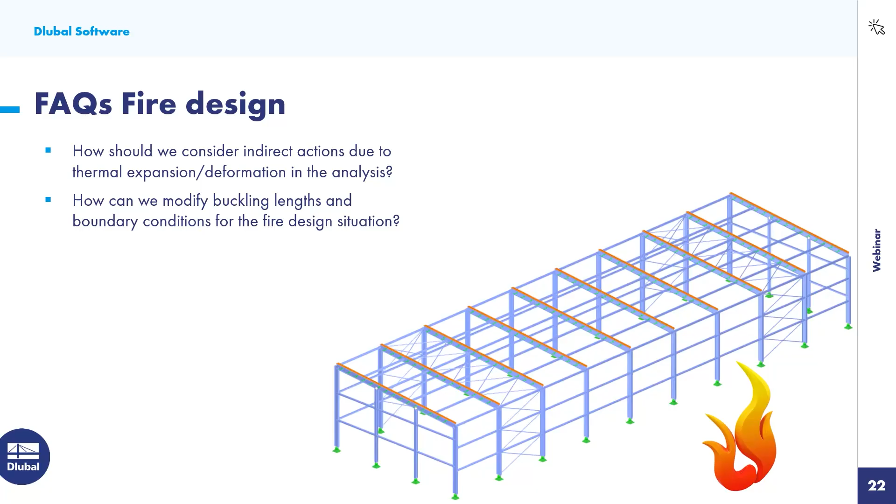How can we modify buckling length and boundary conditions for the fire design situation? Eurocode 3 Part 1.2 allows for reduction of buckling length in some specific cases. Such design situation dependent modifications of the buckling length can be taken into account with our construction stages add-on, and I want to quickly show you the necessary steps how to set this up.

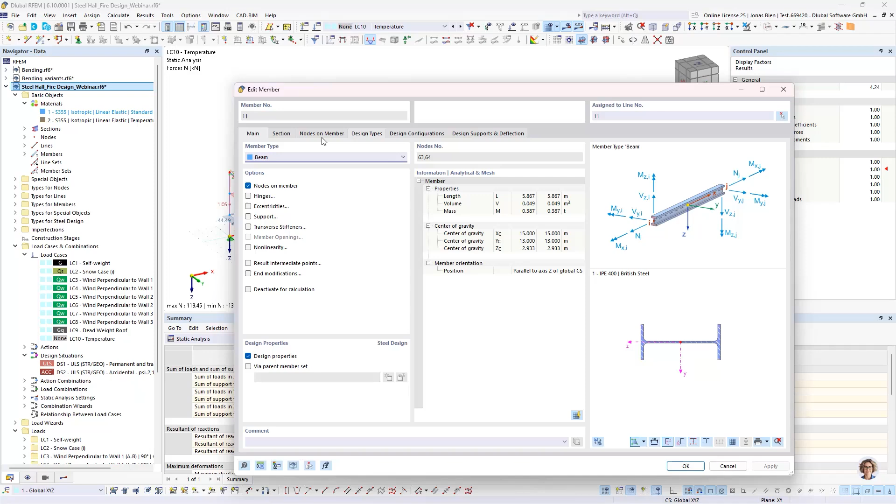So let's go back to the program again. I don't want to go into a detailed explanation of the construction stages—there are some additional webinars you could look into if you're interested—but I'll just show you the procedure for how we can modify the buckling length. In this model, there are some buckling lengths applied for these columns, for example, and we want to change them for the fire design case.

So I activated the construction stages add-on, and I create a new construction stage where I want to activate all my objects that are relevant for my analysis—so all the members and nodal supports. I don't have any line supports or surface contacts or rigid links.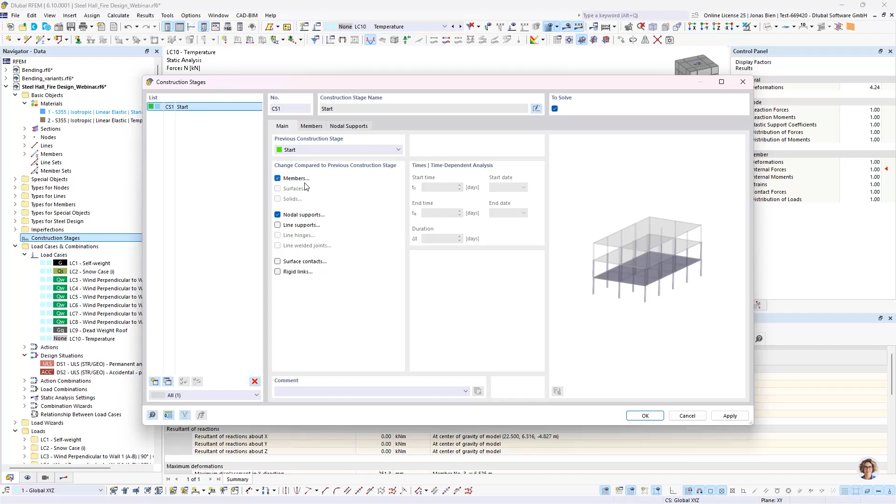Under the member tab, I can not only activate or deactivate members, but I can also modify them. For example, I could say for this column, I want to define some steel design configuration, like the effective length settings, and override my original assignment of buckling length with a new one. Let's take for demonstration purposes the type 2 I have already defined, but it could be any effective length type I've modified from the original version.

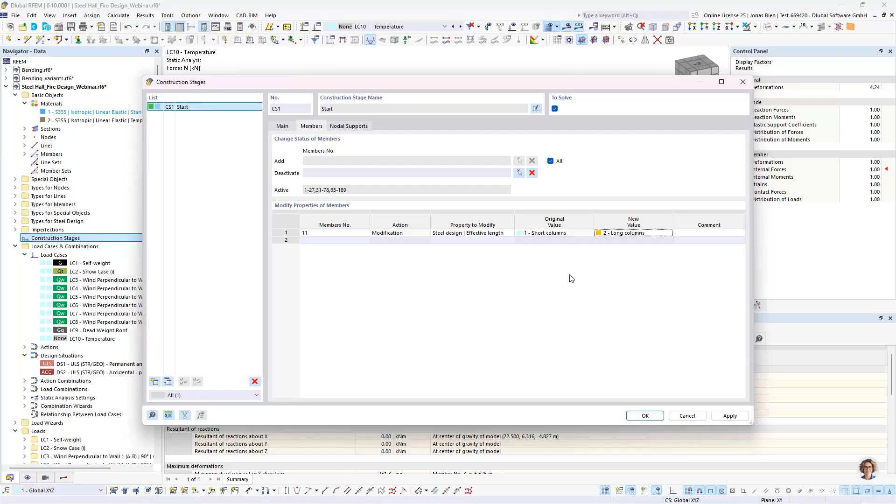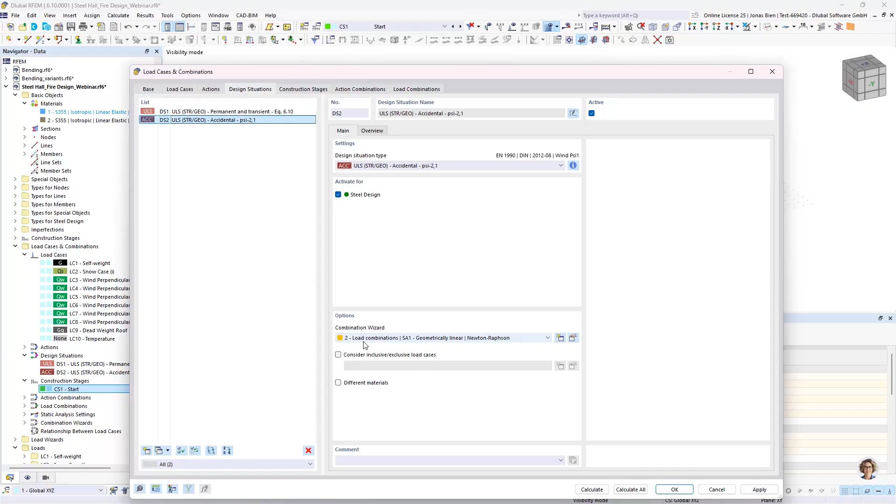I apply this with OK, and then to assign this construction stage to my design situation 2, I need to apply all the load cases to this construction stage. The easiest way to assign the construction stage to all load cases generated in design situation 2 is to modify the combination wizard. So let's just copy the first one.

In this case, we want to consider an initial state, and this initial state is defined as our construction stage 1. I apply this with OK, and now let's see how those load cases look. I can see that for all the generated load cases, construction stage 1 is now considered active, which also means that the buckling length modification would be active.

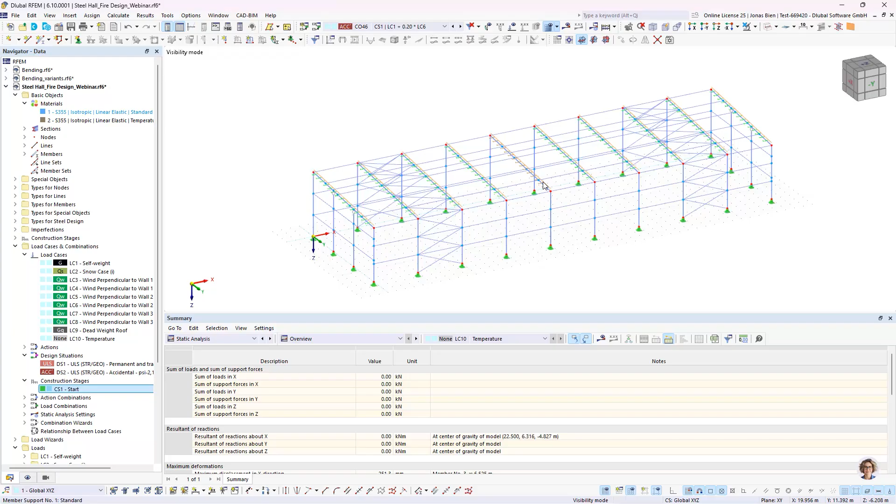A second scenario would be that you may want to change a boundary condition for the stability checks. For example, in this case when I want to leverage the rotational restraint of these girders in the cold design case, I may wonder if this comes from a trapezoidal sheeting, should I take this beneficial effect into account in the fire design scenario too? If there's a fire in this steel hall, these trapezoidal sheetings heat up very fast because they are very thin, just 1 or 2 millimeters, and as we learned, the material properties degrade very fast, so I wouldn't have much stiffness helping in my lateral torsional buckling design check in the fire design situation.

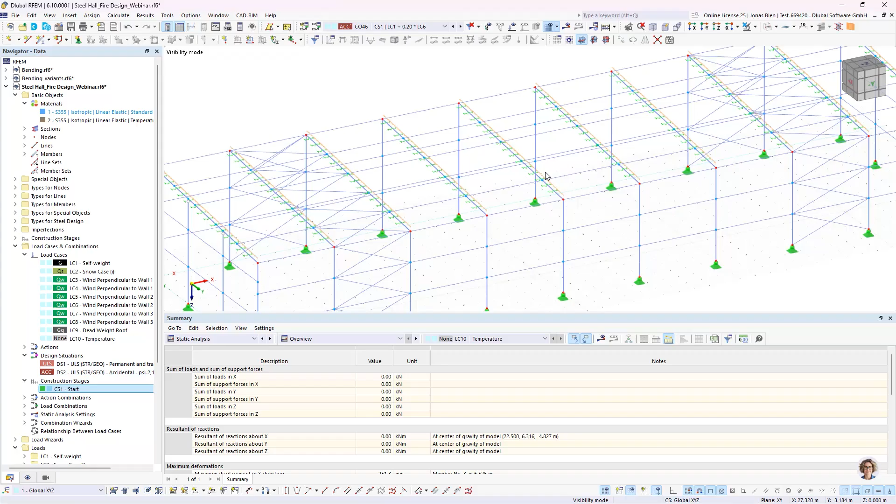So if I want to be on the conservative side and not use this beneficial factor in the fire design situation, I could deactivate these member supports in that case. That can be done via structure modification. I could assign the structure modification to the combination wizard—that would be the most elegant way to have it active in all the load combinations automatically generated. So I again open the combination wizard and also activate the structure modification.

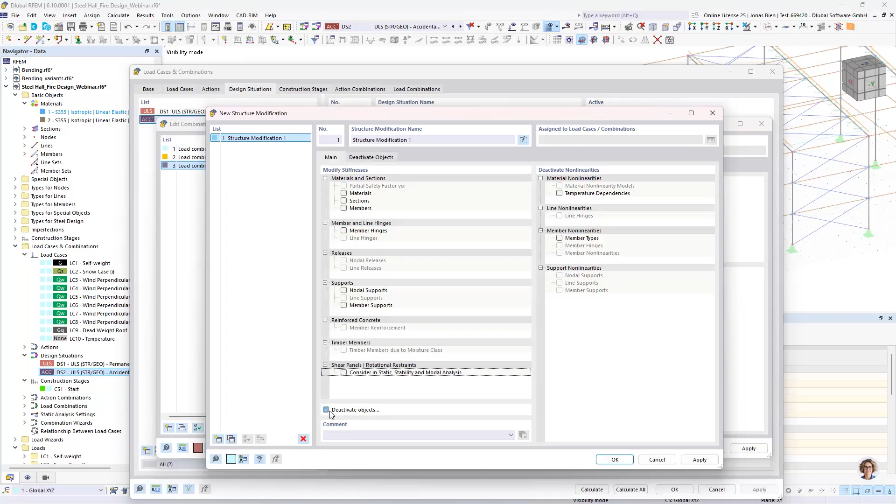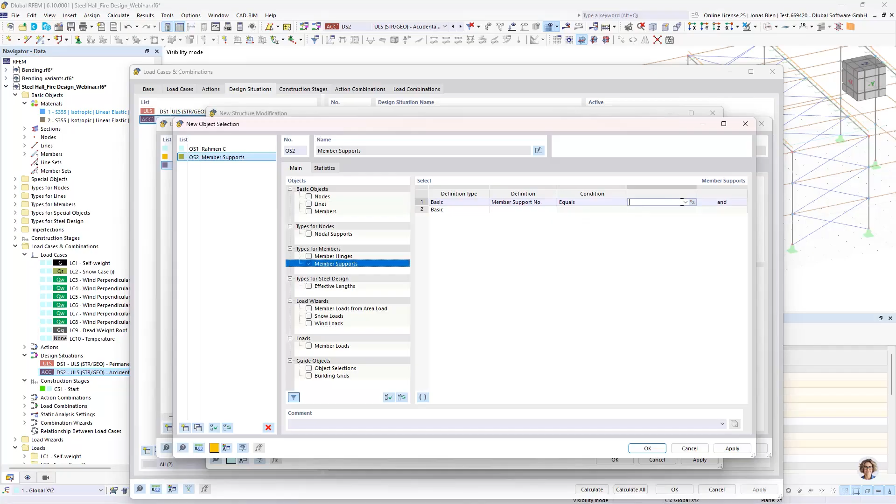In that structure modification, I want to deactivate specific objects—in this case, the member support—and to tell the program which member supports I want to neglect, I need to create this object selection. Here I can select the member supports by their number, or select them graphically, though I need to make them visible first.

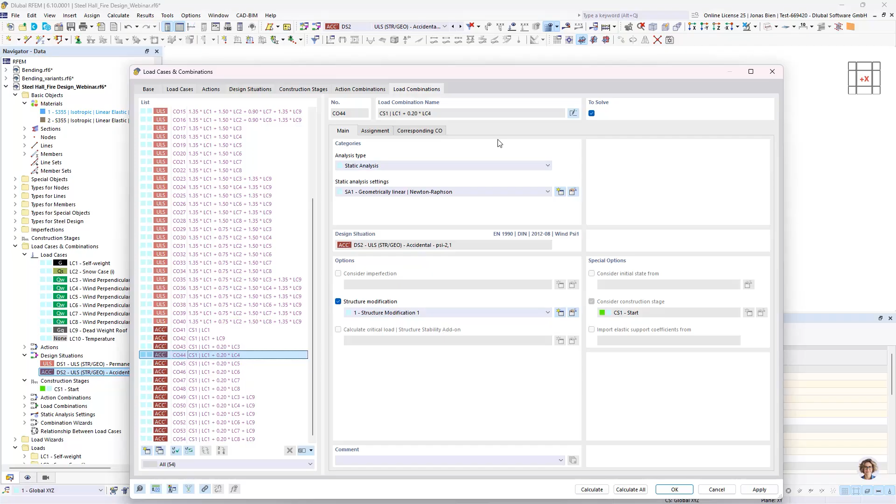In this case, I would also take into account the structure modification, and all the generated load cases and load combinations would have not only this construction stage where I modified the buckling length, but also the structure modification where I deactivated those rotational restraints for the stability design of those girders. So I could do all of this.

I am actually not sure in which cases I would do so, because the Eurocode also has a paragraph on how to define or take the boundary conditions into account in the fire design situation. It actually says that the kinematic boundary conditions at supports and ends of members applicable at room temperature may be assumed to remain unchanged throughout the fire exposure. So this is just if you want to be on the conservative side, and it's a bit of engineering judgment if you want to modify those in the event of a fire.

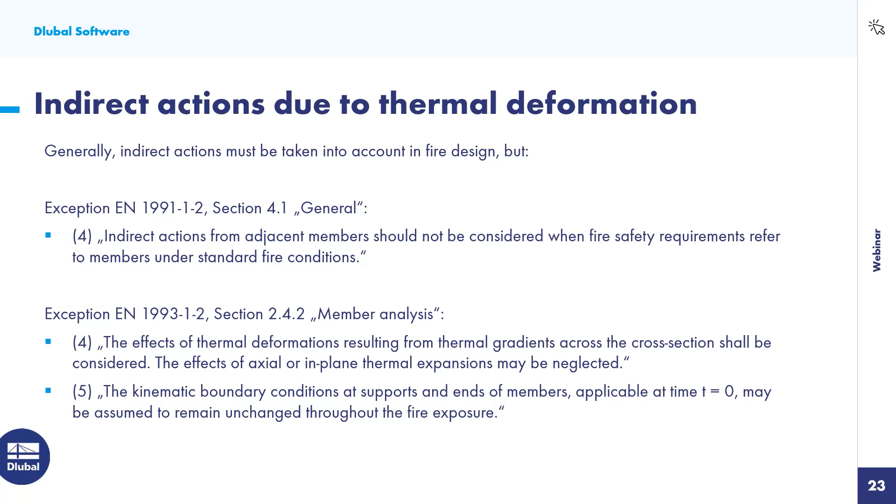Okay, the third question considers the verification of steel joints. When thinking about a complete steel structure, we should not forget that we also have to verify the joints besides the members. In RFEM 6, we have a dedicated add-on called Steel Joints for the verification of joints, but unfortunately, the design under fire conditions is not considered therein, at least not yet.

But experience from real fire events shows that joints are often not problematic. This is mainly due to the local mass concentration caused by welded-in sheets or stiffeners and bolts in that area. The increased mass means that the joint usually heats up much less than the connected members. We also have significant shadowing because of these additional plates, which also affects the heating process. As a consequence, Eurocode 3 Part 1.2 provides very simple rules for the verification of joints under elevated temperatures.

I think this is sufficient in many cases. Under section 4.2.1, it says that the verification of joints can be considered settled if the fire protection system used for the joint is equivalent or better than the fire protection system of the joint members. The second condition is that the utilization of the joint should be lower than the utilization of all the joint members under normal temperature. So in the best case scenario, we wouldn't even need to do a hot design for our joint.

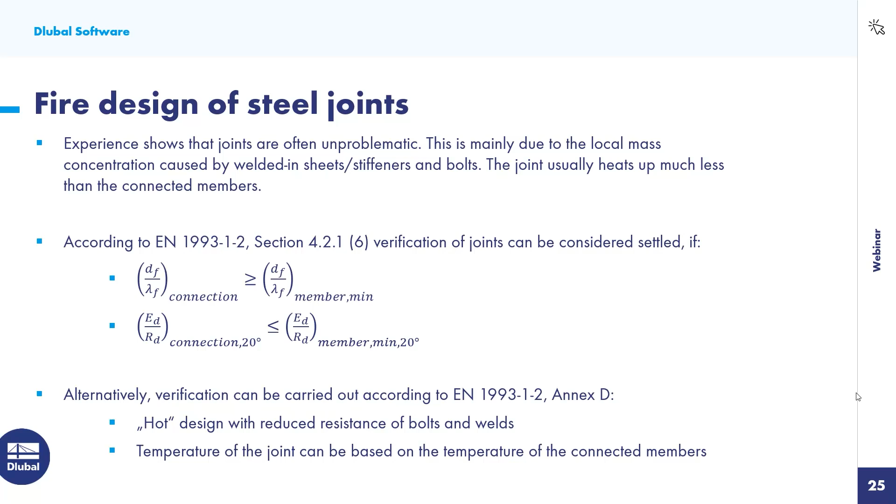The last question I want to tackle is how can I calculate the critical member temperature? This is also raised quite often. As I explained initially, the simplified member verification can be done resistance-based or temperature-based. For now, we have only implemented the resistance-based approach since it is generally more economic and has a wider range of application. However, we are currently working on the implementation of this critical temperature calculation as well, as many customers are requesting this feature. So I hope I can give you an update on this very soon.

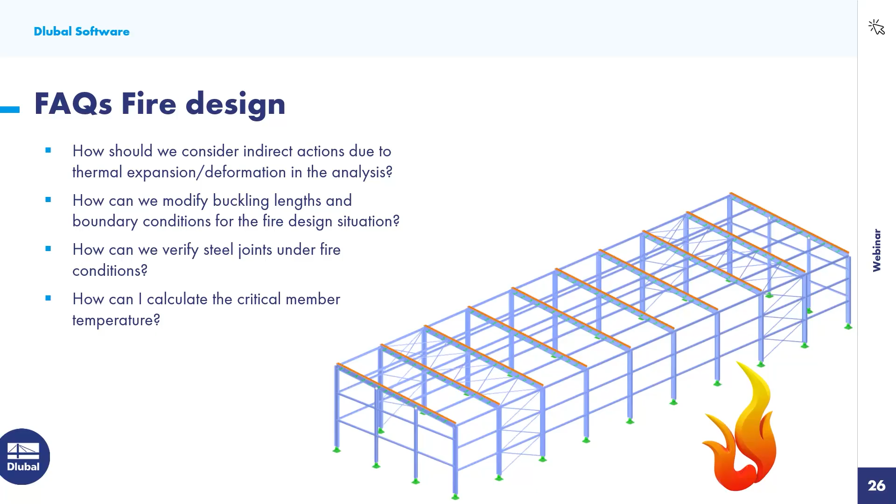With this being said, and looking at the clock, I would close the presentation and hand back the word to Andreas. Thanks a lot for your attention. I hope you learned something today. If you want to discuss something with me, feel free to reach out. And I hope we see each other in the next webinar. Bye-bye.